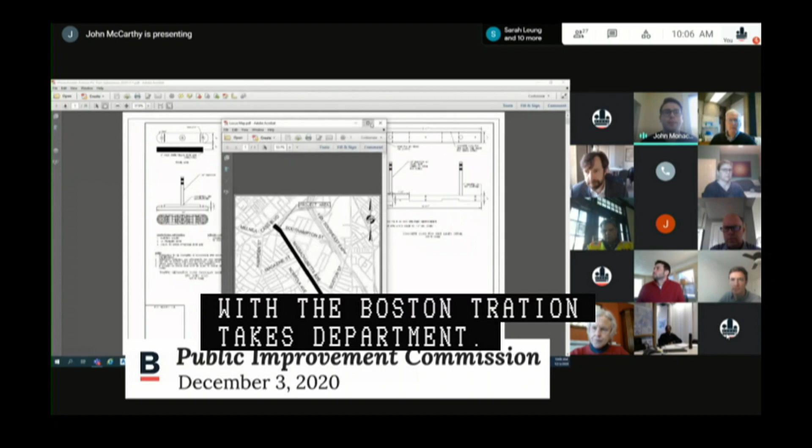While they prepare the screen there, just for an introduction, my name is John Monacelli. I'm a senior engineer with the Boston Transportation Department working on this project. I'm joined by our consultants from Toole Design Group. This is John McCarthy, who will be presenting and discussing the project. This stretch of Mass Ave is one of our worst crash corridors in the entire city for all users, drivers, people walking, people biking. What our project aims to do, as we brought to new business 2 weeks ago, is make specific improvements along that corridor to address some of the most significant safety issues that we have recorded. It's only the first phase of the city's work here.

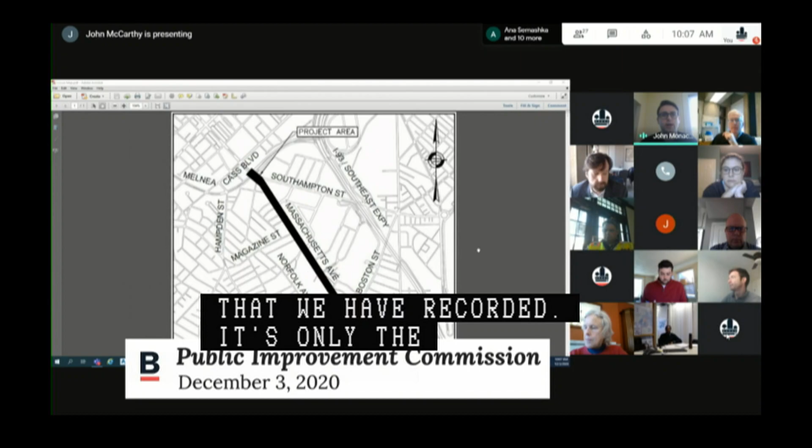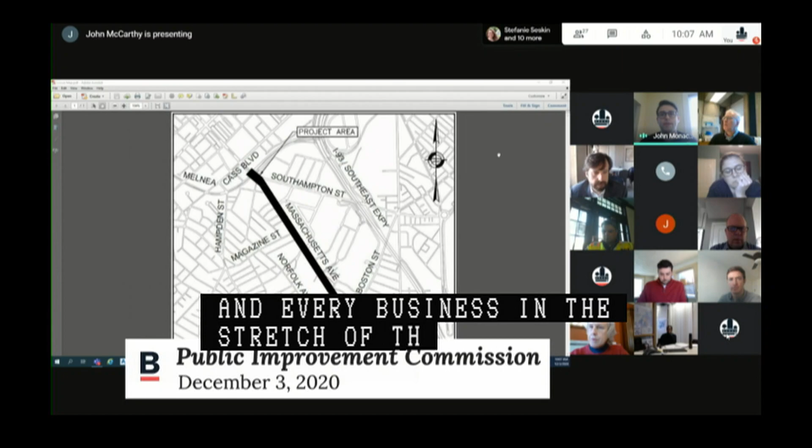There's a public works project to come back and follow us for a variety of other things. But today we're focused on creating accessible ramps, as the chief said, adding a two-way bike facility, and building accessible bus boarding island platforms. We kicked this project off over a year ago, engaged in extensive community outreach, abutter discussions and engagement, and every business in this stretch of Mass Ave. There's a lot of excitement and interest in these changes, and we're really glad to come back to you for this public hearing. We've received a lot of feedback from advocates and community members regarding our proposed changes. So again, John McCarthy with Toole Design Group, I'll hand this over to him to do a brief walkthrough of the project.

Good morning, everyone. Can everyone hear me? We can, John. Okay, great.

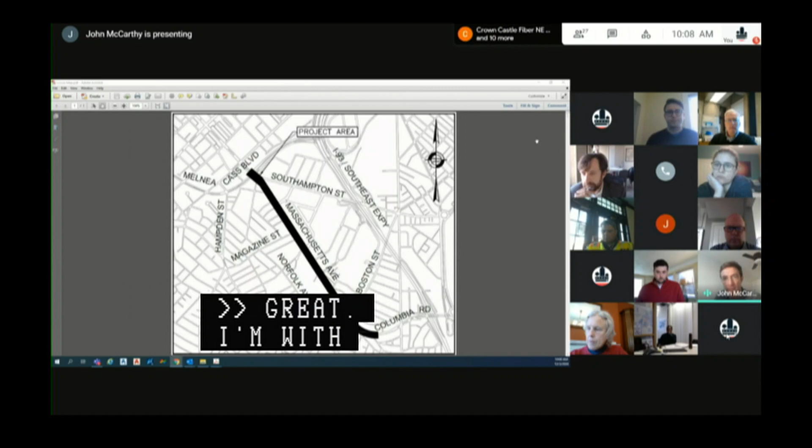As John mentioned, my name is John McCarthy. I'm with Toole Design Group. I'm presenting today on our 10-foot wide separated two-way bicycle facility on the west side of Massachusetts Avenue. As you see here in the map, our limits are Melnea Cass Boulevard to Columbia Road. I'm going to start with the detail sheet, since a lot of these are standard city details and we're going to be repeating them throughout the corridor. We start here with the concrete curb. This provides a separation between motor vehicles and the bicycle facility. It would be located within the stripe buffer, approximately 11.5 feet from the curb and 20 feet on center. As you see, the flex posts are mounted on those concrete curbs, providing that separation.

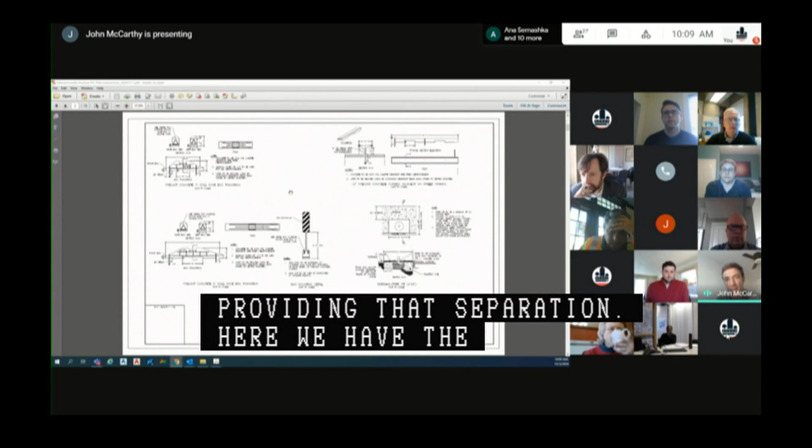Here we have the bullnose concrete curbs. These will be at the intersection ends for more visibility, so as vehicles are making turns they can quickly identify that there's a bicycle facility there. Again, we're using all city standard details for our curb ramp improvements, sidewalk repairs, and drainage structures. Then we have 5 floating bus islands along the corridor.

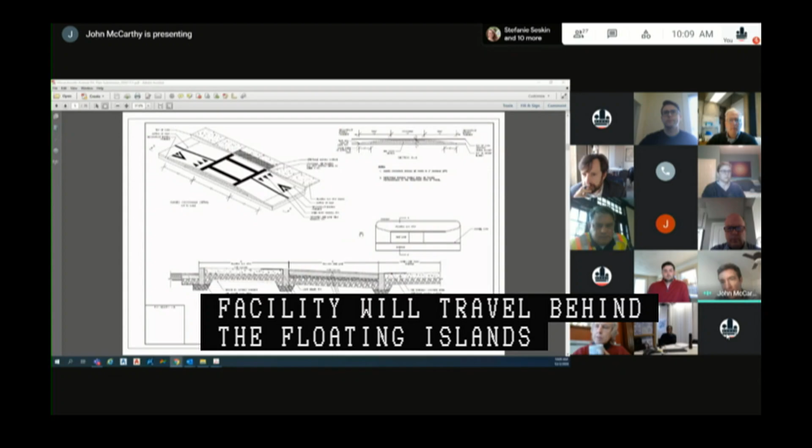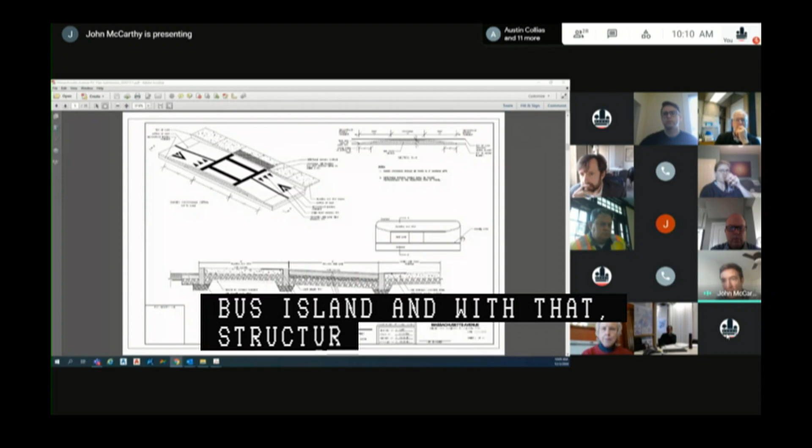Essentially the bicycle facility will travel behind the floating bus island. So if we look here in the plan view, we have a 10-foot two-way bike facility coming in. It narrows down to 8 feet as it moves behind the floating bus stop. People boarding and alighting the bus will use this elevated crosswalk and board from the concrete floating bus island. And with that, drainage structures had to be implemented at either end to capture stormwater, so there's no ponding due to the raised crosswalk.

Again, just standard city details for our drainage. And then as we get into the plan set, here we see the bullnose concrete curb end treatments, again at the intersections, and the standard concrete curbs, providing that separation with the flex posts along the corridor.

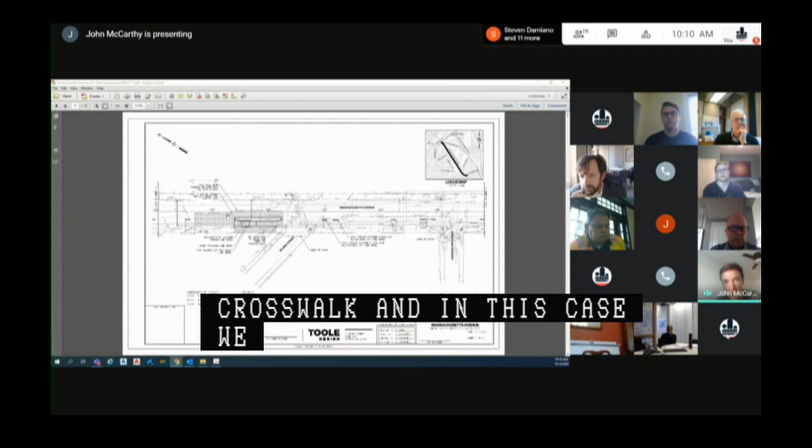Here's that floating bus island that we talked about in the detail, that raised crosswalk. In this case, we didn't need to put drainage structures in because we were able to regrade the roadway to make that drainage work. Again, we have the curb separators. Again, another floating bus island with regrading of the roadway, and here we see one of those new storm inlets.

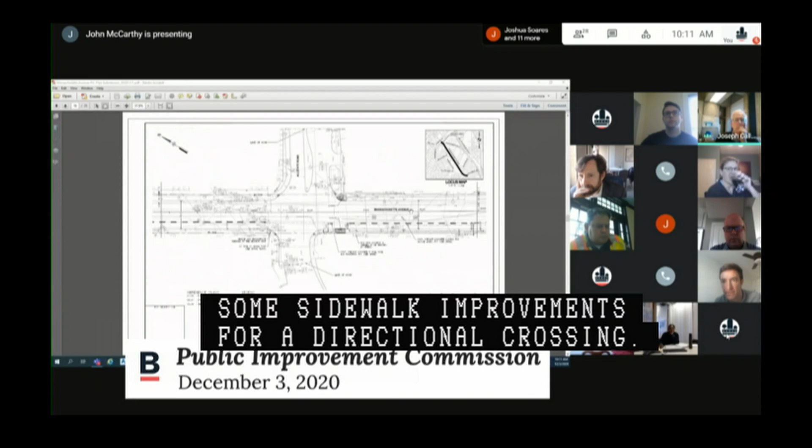Some sidewalk improvements for directional crossing. Again, some curb ramp improvements for directional crossing. Floating bus islands. And again, it's a continuation of the concrete curb barriers. And then our project ends at Columbia Road. Does anyone have any questions?

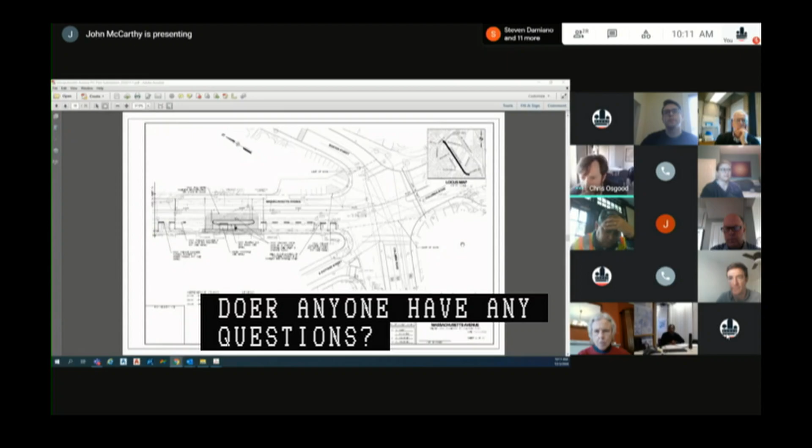Questions or comments by members of the commission? John, this is PJ. Can you hear me? Yes, I can hear you. Awesome. John, can you just zero in on one of your floating bus islands? It doesn't matter which one. I have a couple of minor comments.

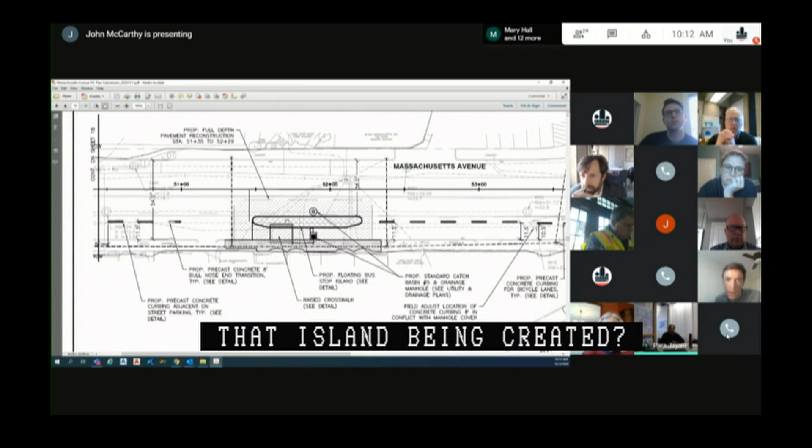Sure. Okay, so basically what is being constructed here is, let me make sure. Okay, so from the side of our sidewalks, we have a raised island that is being created. Yes? Yep. Okay. So at the two edges of your floating island, it is the bus island. Okay, that's what I'm speaking of. What vertical devices do you have to denote that you have an island in the middle of a travel lane? What do you have? I was unable to pick that detail up in your plan sheets.

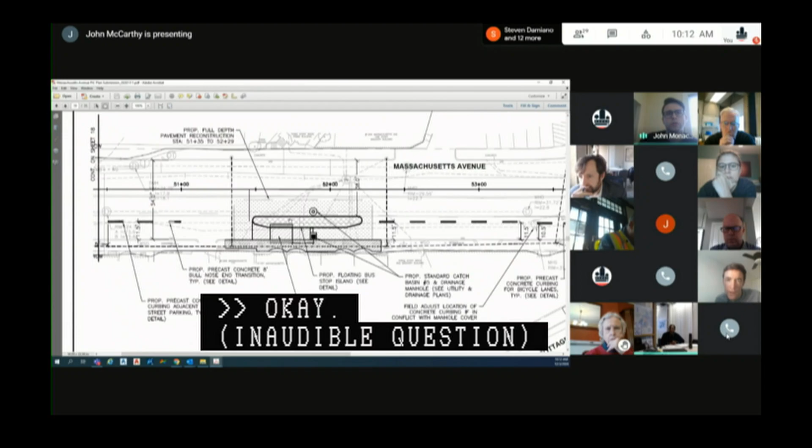So, John, I'll jump in here. So, Para, I know that the edge of that bus platform doesn't align with the curbing as shown here. As a minimum, we'll have the MBTA bus stop signposts at the front and rear to demarcate that the platform is for buses or for passengers.

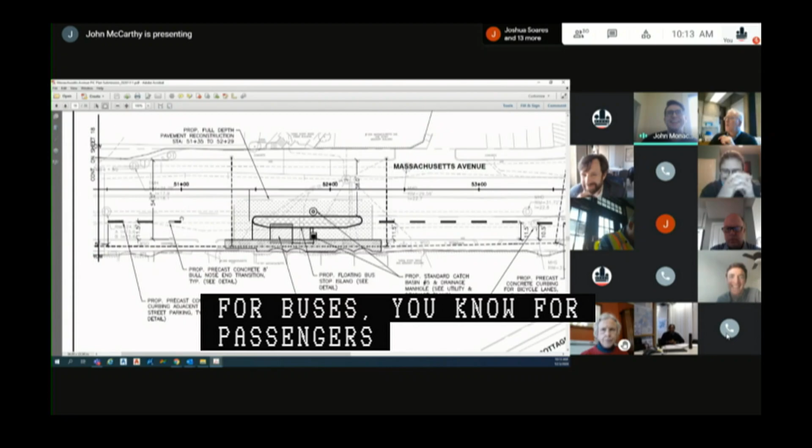John, excuse me. Okay, this is going to be weird because both Mr. McCarthy and Mr. Monacelli have the first name John. So I'll try not to mess this up. But Mr. McCarthy, could you please, since you are controlling the screen, control the pointer because this is a public meeting. Sure.

So this way you can synchronize Mr. Monacelli's comments to Mr. McCarthy's pointer. Pick either approach, and I want to understand the experience of a driver, someone in a vehicle, or a snowplow that is coming through this area where now you have introduced this island, and there's a sequence of signage that is needed in advance of the island and on the island. And I was unable to pick up what those items are in your plan sheet. So if I missed it, that's my bad. But if it is in the plan sheets, please tell me. And I'm desperately hoping that it is my bad.

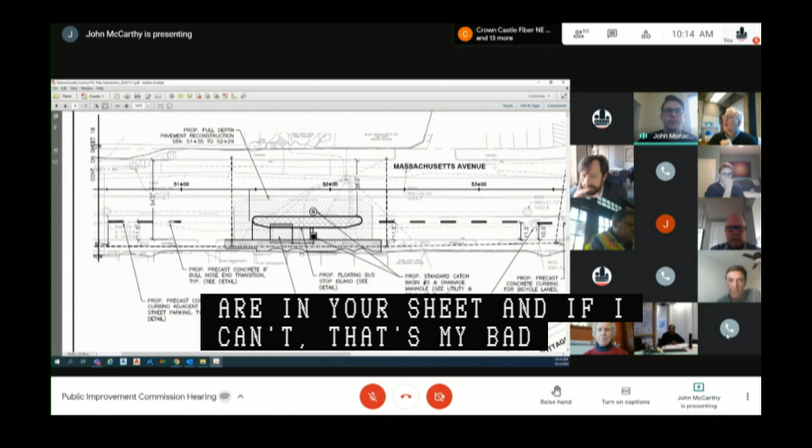No, a lot of the details are just in the sign and pavement marking sheets. So not your bad, Para. That small thing on the left there showing the bullnose with the two-tone white and black, that'll have a standard object marker sign on it. So that is one of the vertical elements there. And then again, on the platform itself, there will be the two signage posts for signs that say MBTA bus stop, no stopping, things like that. So those will be the same.

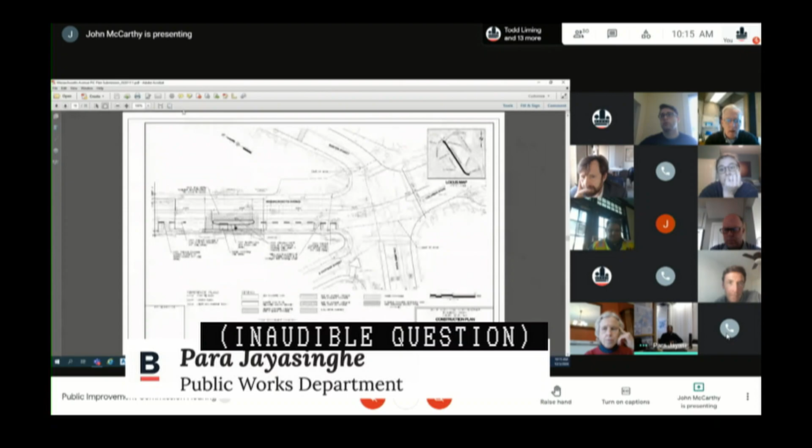So Mr. Monacelli, thank you so much. And Mr. McCarthy, since you showed 34 some pages, is that detail on the island somewhere within the sheets which you just showed to us? This detail, Para? Yes, so the vertical devices, where is this bus stop sign? Do you have the sign plan in this? I don't have the sign plan in this set, no.

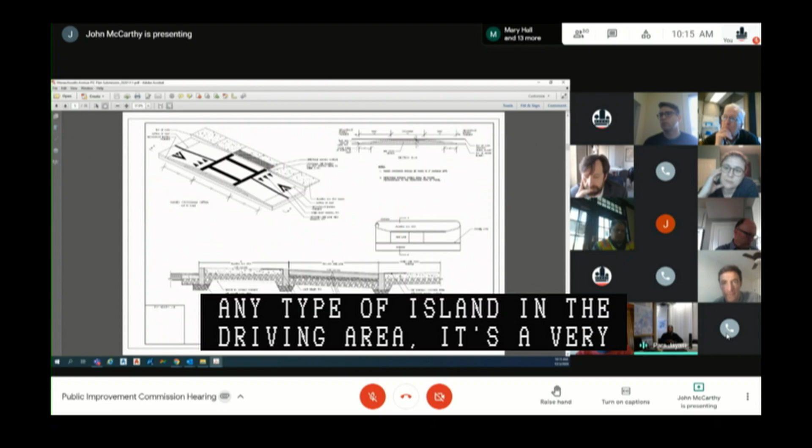Okay, all right. So I don't want to labor the point, but Mr. McCarthy, I hope you know what I'm trying to say. Because when you introduce any type of an island within the driving area, with snow and all of that stuff, there needs to be adequate visibility. Because Mr. Monacelli did mention that this is a very high accident corridor, and we want to make sure that what we are doing is going to reduce overall accidents, not just reduce one type and then have an increase in the other types.

So hopefully your signage plan for the vertical devices conforms first of all to the Manual on Uniform Traffic Control Devices and for highway design. I'm going to assume. Absolutely. Yeah, we'll make sure it is.

Awesome. Thank you, John. Well, nicely done. This is an amazing project, and kudos to all of you for taking on this challenge. Thank you. Thank you, Carter.

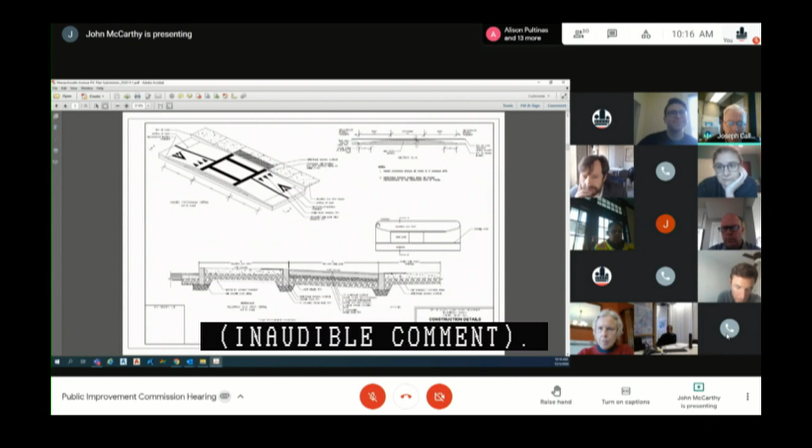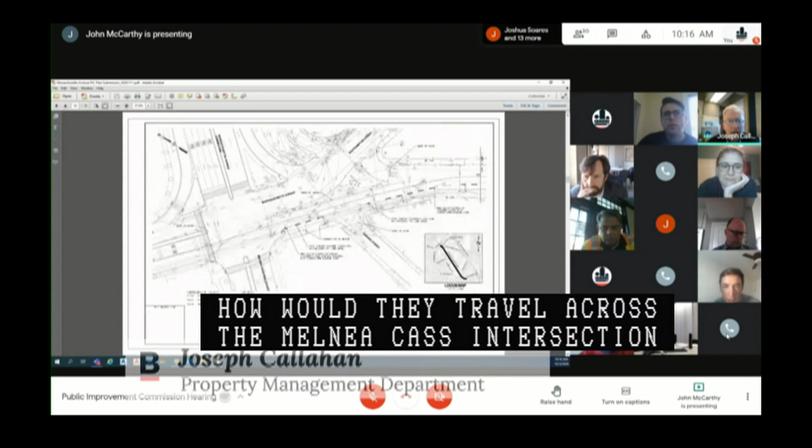I have one question. This is Joe Callahan from Property Management. John, if somebody's traveling on a bicycle from Columbia Road heading toward Charles River, just show me the path. How would they travel across the Melnea Cass intersection if they're on Massachusetts Ave? Do you have a recommended path of travel? Yes. You're talking about from here to here? Yeah, if they're traveling from Columbia Road to, say, the Charles River.

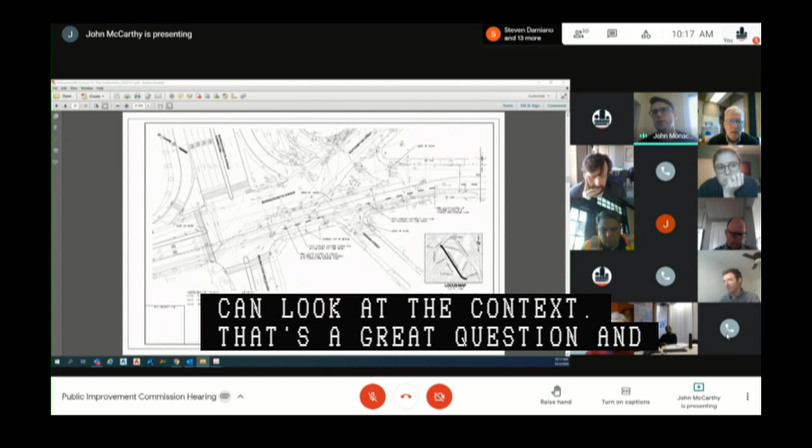And the bike lane is two lanes, two-way from Melnea Cass to Columbia Road. What happens when they cross Melnea Cass heading toward the Charles River? What's the planned path of travel? John, can you just bring up the pavement marking so that we can take a look at the context? Joe, that's a great question. The non-permanently built elements, the sheets on the pavement markings, will make that clear. The transition from the two-way to a pair of one-ways. Just give me one second, sorry.

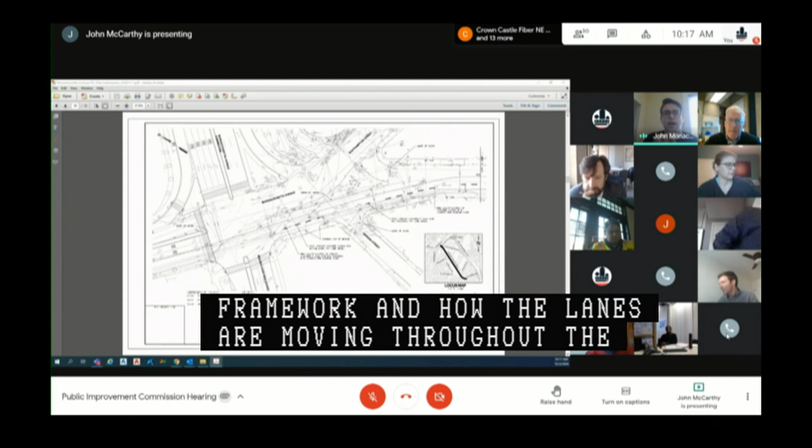Yeah, while John's doing that, we looked at the way that the signal operates here and worked within that framework of the different phasing and how the lanes are moving throughout the cycle of the signal. And then putting pavement markings and staging areas to work with that phasing so that cyclists can make the transition from the northbound two-way cycle track to the standard northbound one-way lane.

Yep, there we are. So left, crossing the intersection with the Mass Ave southbound through movements, and then you'll be crossing the street with the pedestrians, crossing Mass Ave with the pedestrians there. Okay, thank you. Thank you.

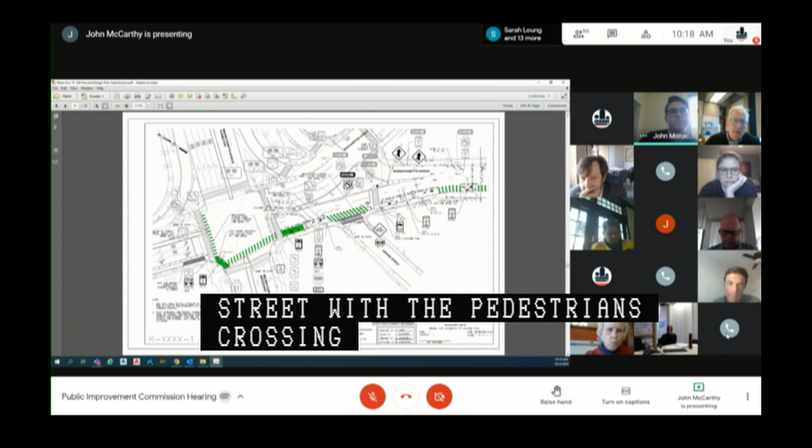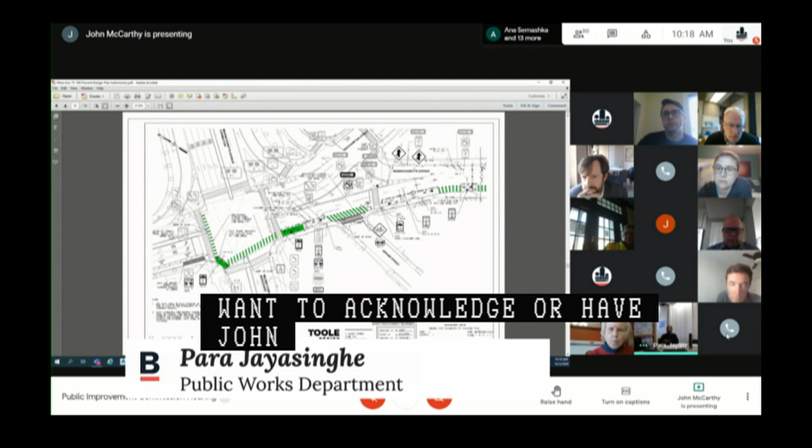Mr. Monacelli, this is again editorial comment for the purpose of a recorded public hearing. Your opening comments did emphasize the fact that this is a very high accident corridor. We are all cognizant. However, I just want to acknowledge the fact that even this intersection of Melnea Cass and Mass Ave, there's many challenges at this location. This project is not addressing those challenges, correct?

Yes. And even between the intersections of Melnea Cass and Columbia Road at the other end, there may be another series of challenging incidents, and all of that are not being addressed by this project. It is just a subset of things. So we are providing multi-modality in terms of bicycle accommodations and ensuring the safety aspect, but there's still another series of challenges which needs to be addressed. Is that correct? That's correct, Para.

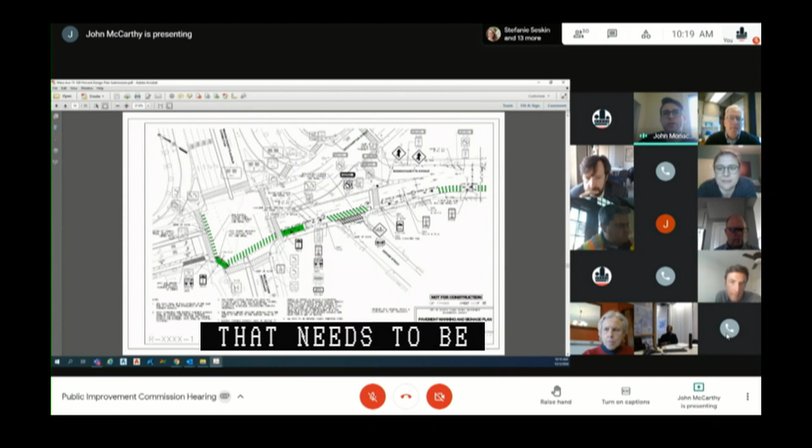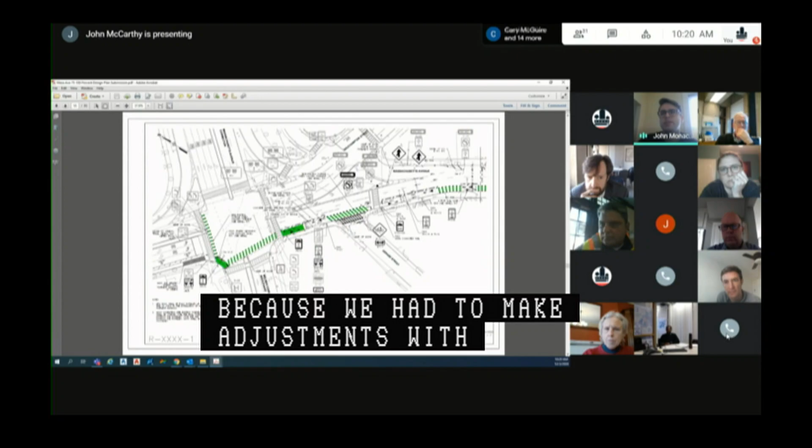Yeah, we're coming in and trying to put in a quick build scenario where we can separate out cyclists and provide a bit more of an experience for folks using the bus lines that are running down there. But yes, between Melnea Cass and Newmarket, there's a couple other initiatives that are coming through for lighting quality and sidewalk accessibility. We did, as part of this project, revisit the way the signals work, because we had to make adjustments with that, but we did make sure that all of the pedestrian crossings are compliant and safe, and bring it up to code. Thank you so much, John.

Again, not to labor the point, but a brilliant project. Thank you.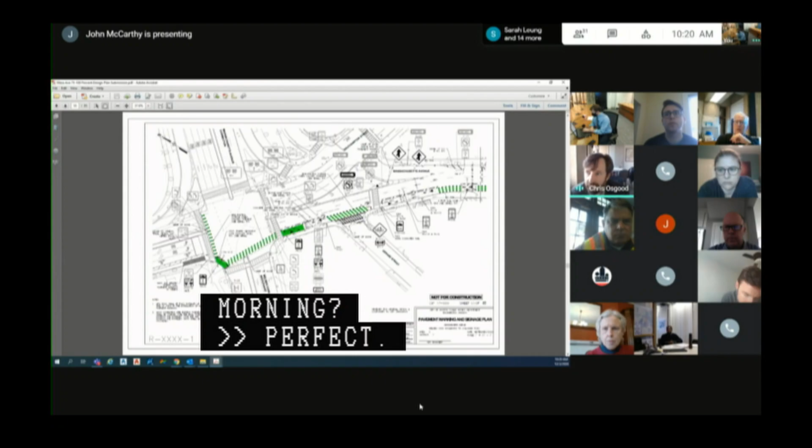Thanks, Pari. Other questions or comments? Todd or Robbie? I believe Chester Square had raised their hand to add testimony. Perfect. If members of the public have an interest in testifying, feel free to either put your name in the chat or use the raise hand function on the Google platform, and I'll turn it over to the Chester Square team to provide some public comment on this.

Hi, my name is Carol Blair. Can you hear me? Hello? Yes, Carol, we can, absolutely. Very good, thank you.

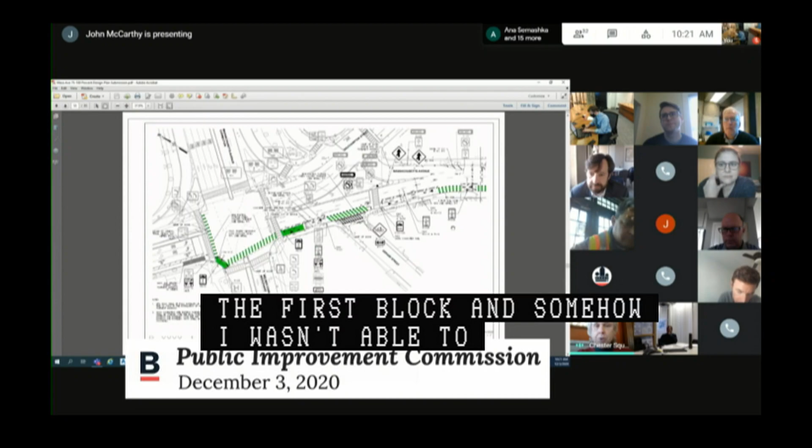Okay. I'm really excited to see this project. I actually saw the notice of the first block, and somehow I wasn't able to attend that, and I guess I wasn't on the list. So I was just unaware of the progress on this project, and it's great. I'm really excited because I go this way on my bike and walking often, and it's a Wild West place.

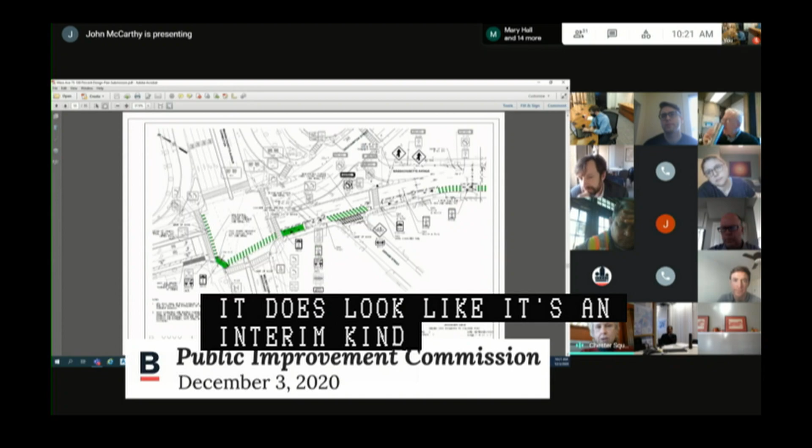So I'm really pleased to see this happening. I am especially concerned about this intersection. I appreciate Paris clarifying things. It does look like it's an interim kind of situation. A specific question I would ask is how the signage and so forth communicates to the cyclist that the intention is that they will cross the street twice

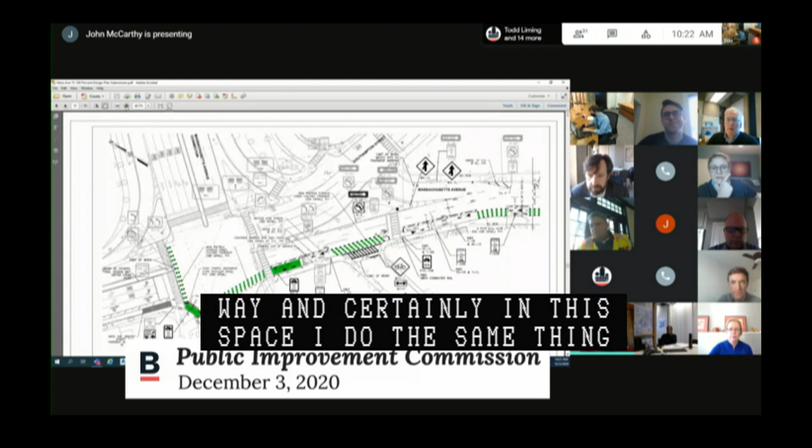on separate signals. I know for myself, having grown up in an era where bicycles were not specifically provided for, I'm accustomed to finding my own way, and certainly in this space, I do the same thing. So it's unlikely that I would practice the behavior that you're expecting, unless it's really, really clear that that's going to be the safe way for me to go. So that's an important piece.

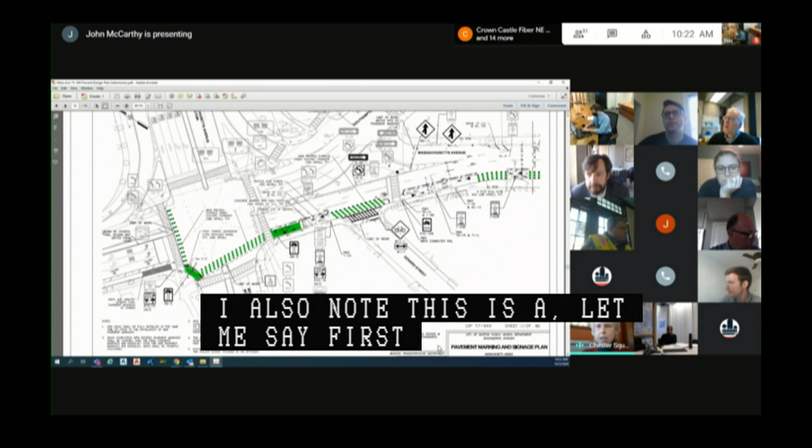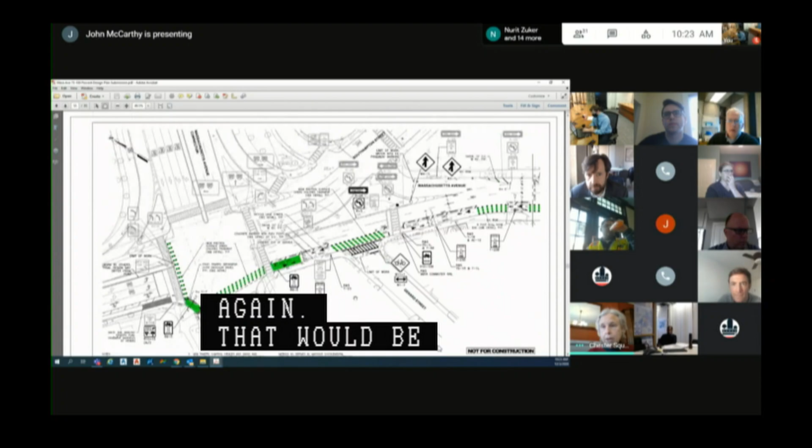Let me say also Island Street. I don't know if you looked at Island Street as a possible connector between Mass Ave and the Melnea Cass Boulevard bikeway. But especially for me, because I often come from the UMass side of things toward Northampton Street, I've picked many directions to avoid going around to Southampton Street and crossing Mass Ave again. I mean, that would be crazy. So I'll go down one-way streets and whatever. But if it looks like it would be easy to make a bike connection between Island Street and the Melnea Cass Boulevard, is it possible that could be made in the near future?

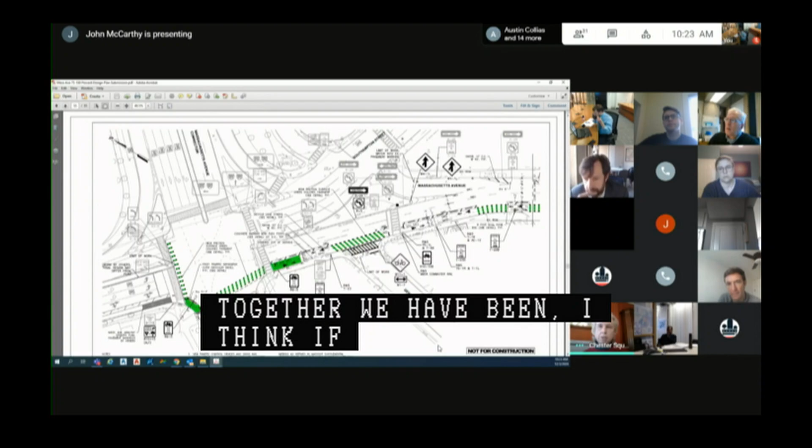And then one more thing I would mention. I'm president of Chester Square Neighbors. I've been working with my neighboring neighborhood associations, Worcester Square and Claremont, and we're beginning to work together as a Mass Ave coalition. I think if we pull in St. Botolph, then we will have the gap that's represented between the protected bike lane in Back Bay and the protected bike lane that you're giving us now. And we will be very eager to talk to you about how to treat that gap. And this transition will be an important piece of that.

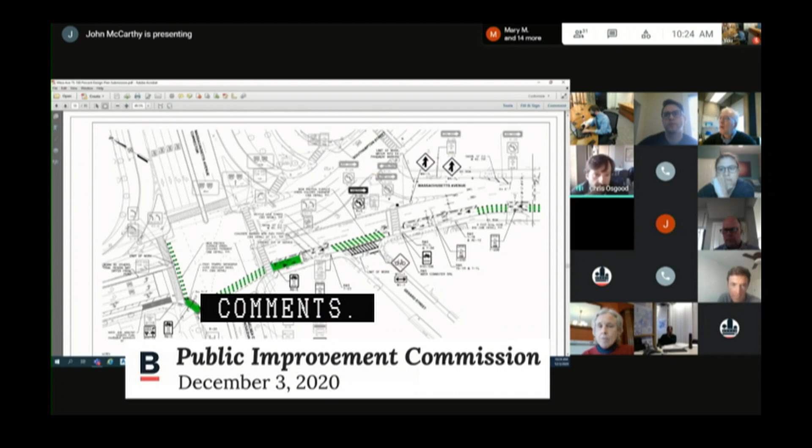Carol, I appreciate all those comments. Please tell me if I'm off on them. I wonder if either John Monacelli or John McCarthy can talk about the signage and how best to navigate this corridor in that intersection. I think Island Street is something which we would want to consider as part of the broader Melnea Cass Boulevard conversation that we're having, and how it would potentially be a path connecting in here. But I defer to John Monacelli on that. And I think we're joined by Stephanie Seskin as well, so between John and Stephanie, to hear a little bit about how to connect this stretch, to your point, with the northern end of the Mass Ave work. But anyway, sorry, John, go ahead.

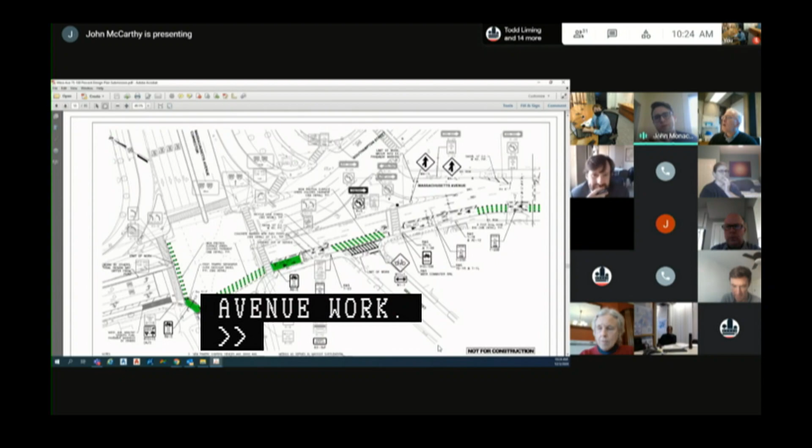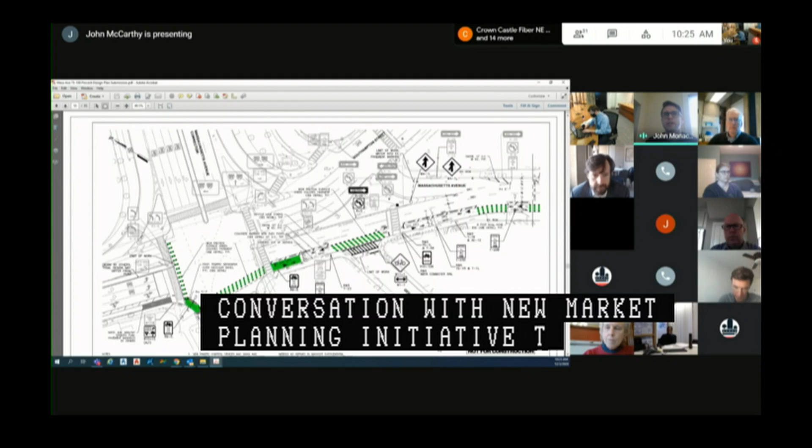No, that's fine. So the Island Street connection first. Agreed that is an alternate route to making some of these movements. However, we do have a lot of presence of heavy trucks, sidewalk conditions and things like that. So I think it's part of the larger conversation with the Plan Newmarket planning initiative to really establish what streets are being developed and built in different ways and what type of infrastructure and safe routes can be put through there. So right now, this is the most direct and safest corridor connection that we could make, establishing the space with the two-way facility, having that physical separation, and then bringing you all the way right to Mass Ave.

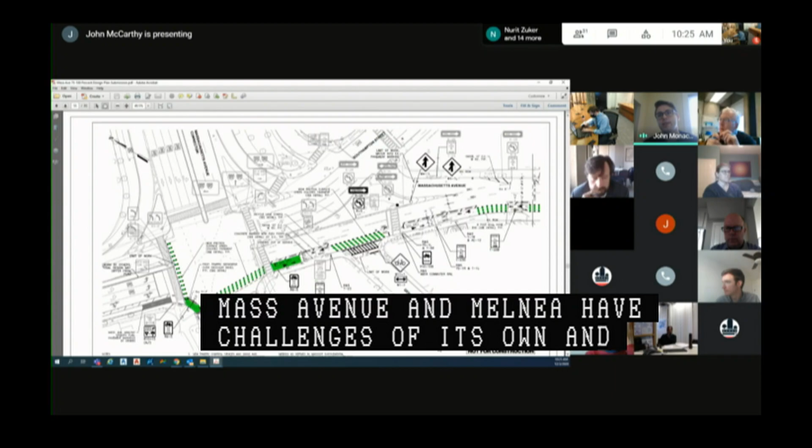Understanding that Mass Ave and Melnea has some challenges of its own. And again, as the chief and Para both iterated, it is part of a larger thing that needs to address a handful of those all at once. The issue of the crossings, about clarity. Not seen on the PIC plans because it's mostly the construction elements, but at many of the signals we are adding bike indications so that it's clear at what point in the traffic operation of the intersection cyclists should be going southbound or northbound on the facility. So many of those intersections will have those indications where they're necessary and where the clarification is really important.

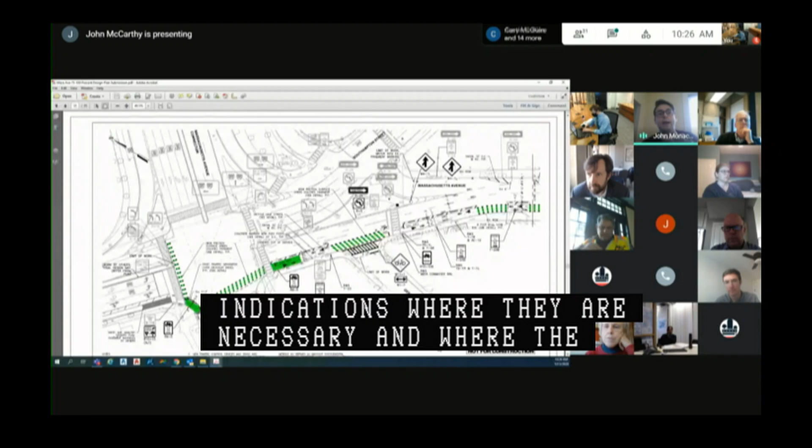Here at this intersection, with the challenges of this location and the size and the equipment of the signal, right now what we're doing is we have these signs, and John, if you could zoom in just a little bit, you can see on the bottom two corners there's a panel. Yep, the R9-5 indicates to cyclists to use the ped signal. So right here, the way that the pedestrian crossings operate, you would just be crossing in parallel with the pedestrians, and the green paint, the skip markings, really carve out a space and identify it very clearly, very vibrantly, that's for cyclists to be in.

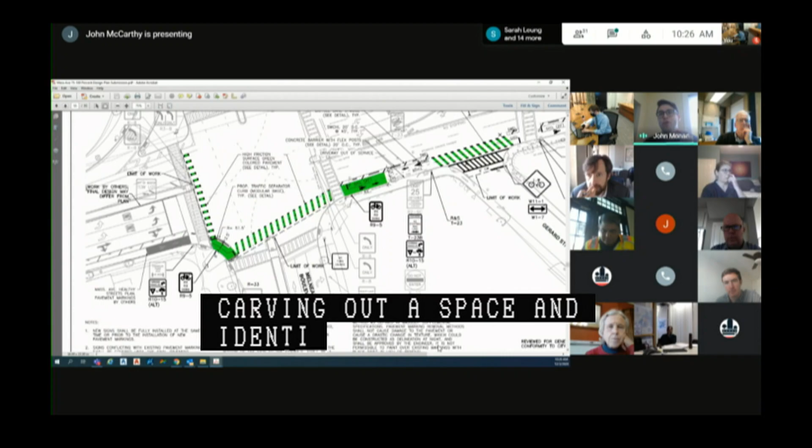Just giving that indication. And again, this intersection is part of a much larger conversation that, a handful of improvements are certainly needed. And to your point about Mass Ave, I can't comment on that one, about filling the gap between Harrison and Westland or so. But yeah, just leave that up. Looking forward to it, until they actually do.

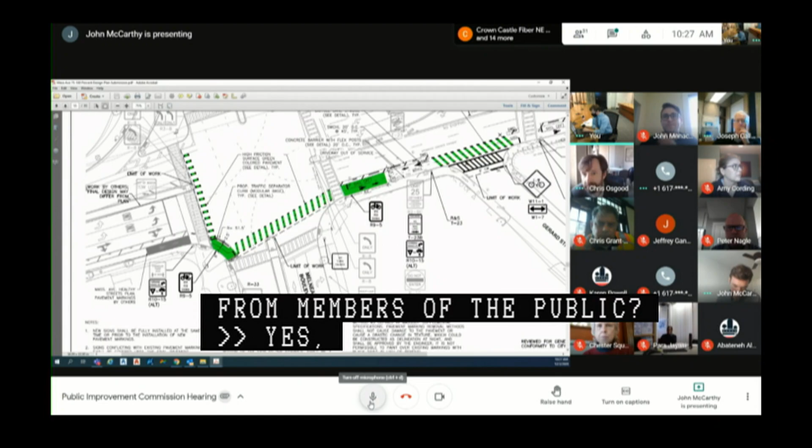Carol, John, thank you so much. Other questions or comments from members of the public? I don't know, Todd, if we see there are other hands that are raised. Yes, Allison Poltinas. Allison? Allison, you may still be muted.

Hi, good morning. I'm really interested in this, very happy to see a two-way path here. A couple of schedule questions. When will this happen? And when are you expecting work on the challenges of the Mass Ave Melnea Cass intersection?

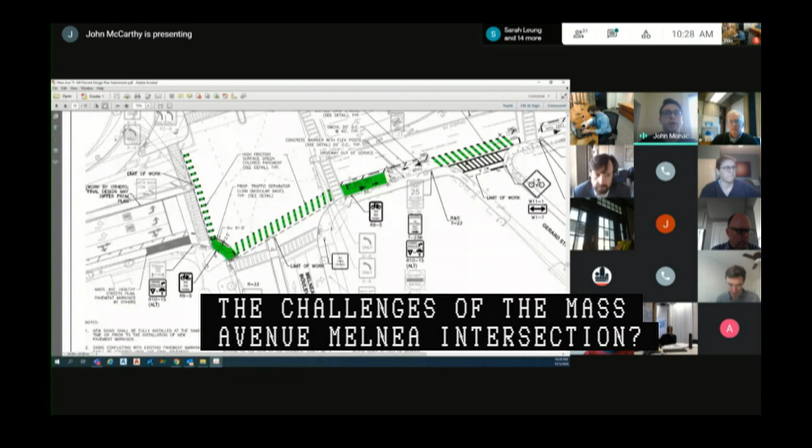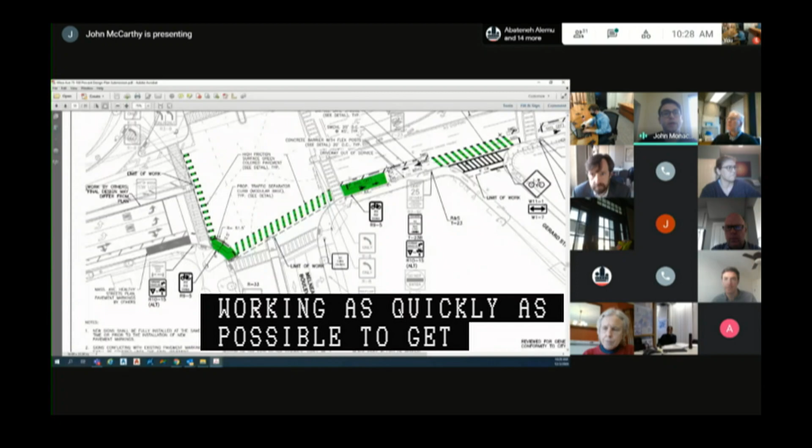So this project here, we're working through the next stage of design with our consultants for this. We probably won't see this implementation until sometime next summer at the earliest, just because we're working through a number of approvals and reviews and things like that. But we are working as quickly as possible to get this on the ground, knowing that it's a necessity and a real improvement. I can't speak to the construction improvements of this intersection specifically, though. I'm just not a part of that project there.

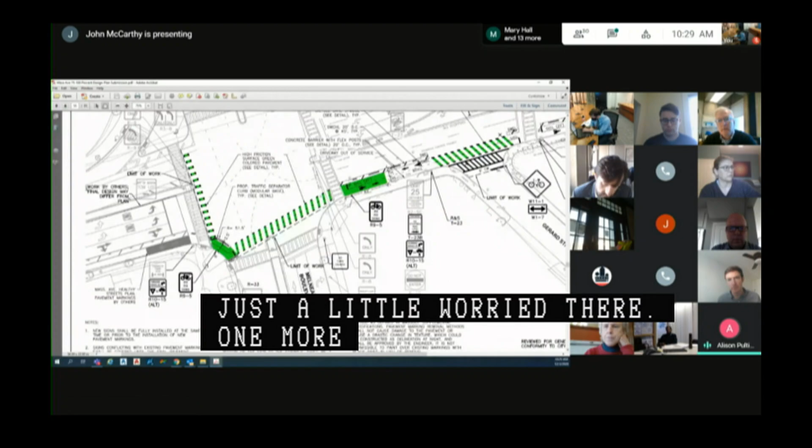Okay, because my concern would be, again, that this is great what you're doing, but will it actually put people in danger at that intersection who are feeling safe, and then all of a sudden they're in an unsafe condition? So just a little worried there. One more kudos, though. I appreciate the fact that you went out to the businesses and the community first before creating the design. That was very helpful. Thank you.

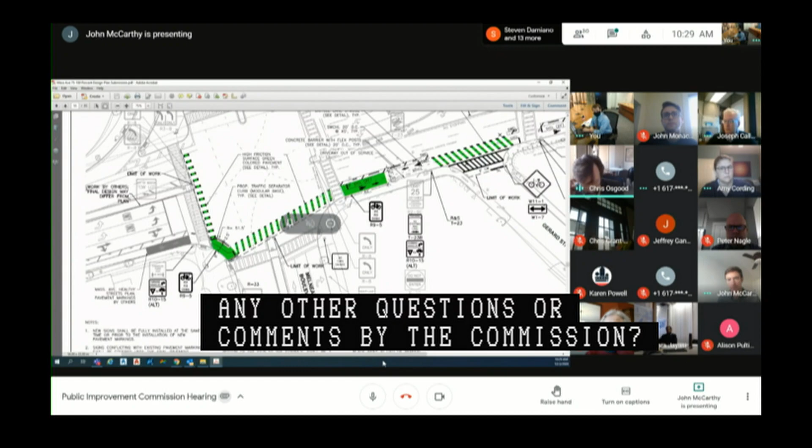Thank you so much, Alison. Other questions or comments by members of the public? I do not see any at this time, Chair. Okay. Any other questions or comments by members of the commission? All right, I'll entertain a motion and a second. I'll make a motion on a joint petition by the City of Boston Transportation Department and the City of Boston Public Works Department for the making of specific repairs in Massachusetts Avenue and Columbia Road as read into the record by the chair. Second. All in favor? Aye. Aye. So moved. Thank you so much. Thank you very much, commissioners.

Good morning, everybody. Good morning. My name's Brian Cunningham. I'm with Crown Castle Fiber Operations, and I'll be representing Crown Castle on this project. I'm also joined today by Mike Saraceno and Anna Samashka, also from Crown Castle. I'm going to bring up the project now.

Can everybody see this plan? I can't yet, but that might just be me. I know it looks like others can't as well. If need be, Brian, I think probably Todd or I might be able to. Let me, hold on one second and see if this... We got it. Yep. Perfect. Got it? Okay, great, thank you.

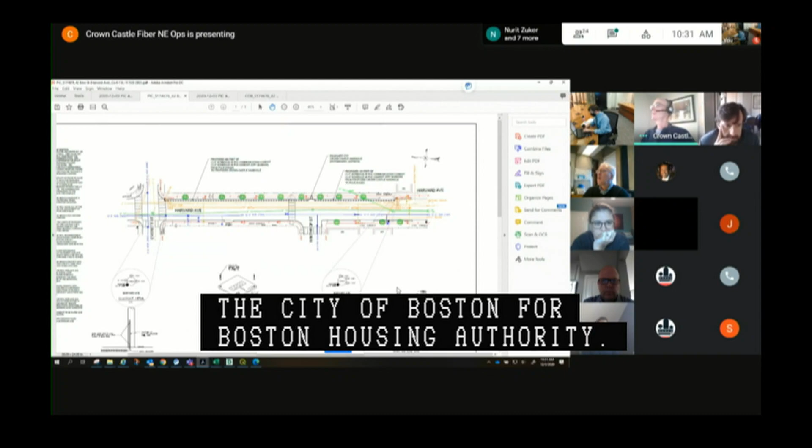Okay, we have an order to provide service to the City of Boston for a Boston Housing Authority location on Bow Street in Hyde Park. In order to provide that service, we're seeking approval to dig and place a trench and install fiber on Harvard Ave, roughly between Everett Street and River Street, from pole 1629/2 over here at this end to pole 1629/5 over at this end. The trench will be 351 feet long.

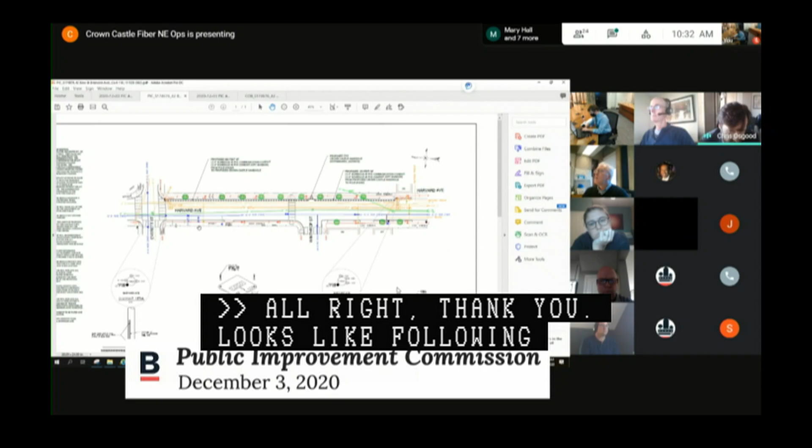Great, Brian, thank you. And it looks like following the new business, the handhold that is going to be added is now in the furnishing zone. Is that right? Yes, correct. We were asked to move this handhold; we originally had it in the street here. In the new business hearing, we were asked to move it into the furnishing zone, which we did and changed the plan.

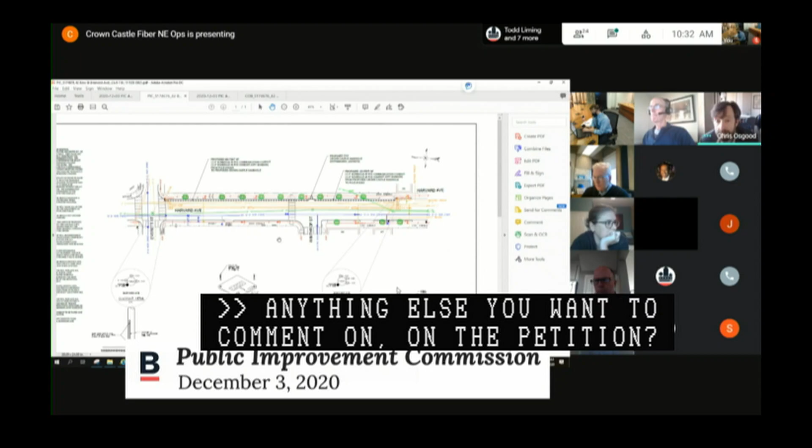Anything else you want to comment on, on the petition? Questions or comments? Oh, go ahead, Brian, sorry. No, I don't believe so. Thank you. All right, questions or comments by members of the commission? Todd or Robbie? All set? Any members of the public? I see none. Okay, I'll entertain a motion on this item.

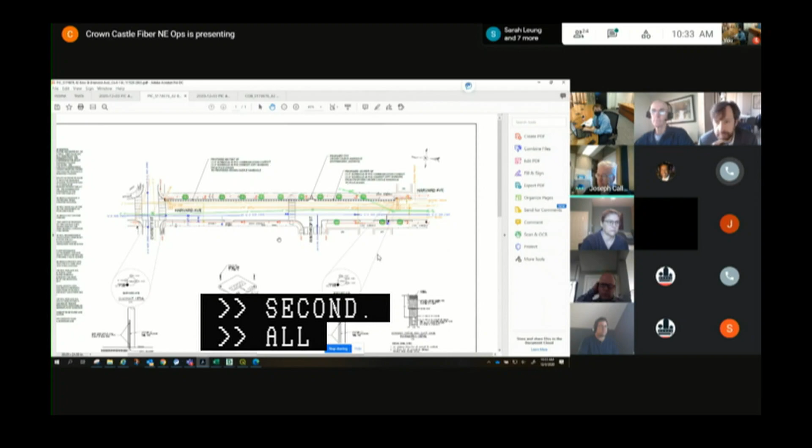I make a motion to approve a petition by Crown Castle for a grant of location on Harvard Avenue in Hyde Park as further read into the record by the chair. Second. All in favor? Aye. Aye. So moved. Thank you so much, Brian. Thank you very much, everybody.

Thank you. Our third public hearing item is on a petition by National Grid for a grant of location to install a gas regulator station and associated infrastructure within Seaburns Avenue, a public way in West Roxbury from Center Street to a point southeast of Brown Terrace, generally at address number 17-19. This was new business on November 19th, 2020, and this is as shown on a set of plans entitled City of Boston Public Works Department, Engineering Division, Grant of Location Plan, Seaburns Avenue and Brown Terrace, Jamaica Plain, 5 sheets dated October 26th, 2020.

Go ahead, Peter. Peter, you're on mute. Better? Thank you. Good morning, Commissioners. Peter Nagel from National Grid. Today, National Grid would respectfully request the Commission's considering a deferral till the next hearing based on conversation with staff. There were several requests at the new business hearing that we would like to close the loop on, and I feel that the 2-week time frame would be more than sufficient to meet those remaining loose ends. Perfect. Thanks so much, Peter.

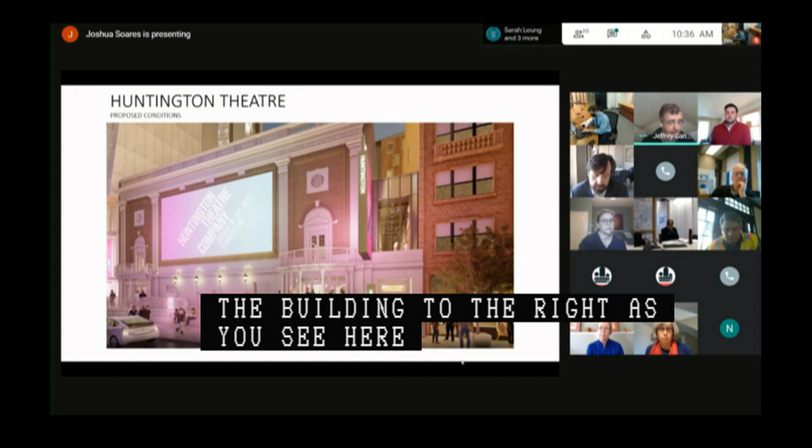Perfect. While he's doing that, this project is a renovation of the historic Huntington Theatre, both interior and exterior. We are putting all new mechanical, plumbing, and electrical systems in the building as part of this renovation. We are not altering the envelope itself, except for putting a small second story addition on what we call the arcade, which is the narrow piece of the building to the right, as you see here. Our team today is Bruner/Cott Architects, and Shawmut Construction is the contractor, and Bruner/Cott's sub-consultants, who I will introduce individually, the folks who will be able to take you through the details and answer any questions: Joshua Soares of Nitsch Engineering, Mary Hall of GZA Geotechnical, Regina Olivieri of Shawmut Construction, and Nareed Zuka from Bruner/Cott.

What we are asking for today, or proposing today, is a temporary support of excavation in the sidewalk outside the building that will allow us access for utility connections and the foundations of the repair and replacement of the historic terrace on the front of the building. So unless there are questions from the commission, I will hand it off to Joshua to take you through the plans and the details. Thank you.

Thanks, Jeff. Sure. So good morning, everyone. Chief Osgood. Again, my name is Joshua Soares with Nitsch Engineering. Let me progress through the presentation here. As Jeff highlighted, what you see on screen here is the proposed conditions, the plaza upgrades. And for context, just a few shots of the existing conditions. The shot taken from the southwest corner of Huntington Ave, showing the elevation and the current sidewalk conditions.

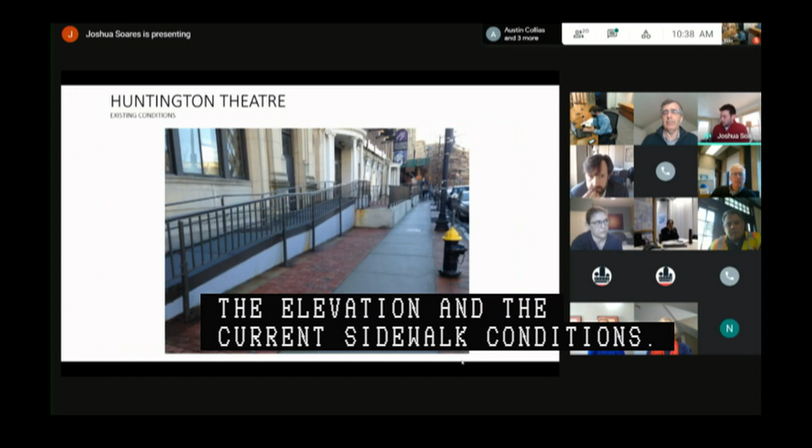So within this public right-of-way, we are proposing the installation of temporary support of excavation. The SOE will consist of steel micropiles and timber lagging. It's proposed to extend along the entire face of the building, roughly 97 feet. The SOE will be internally braced.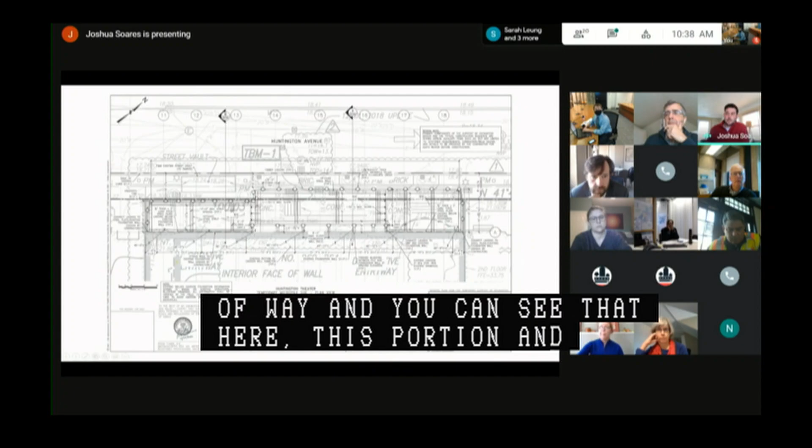However, portions of the SOE will extend beyond the property line and into the right-of-way. And you can see that here, this portion. And that is required in order to accommodate the installation of the underground stormwater detention tank outside of the property beneath the sidewalk.

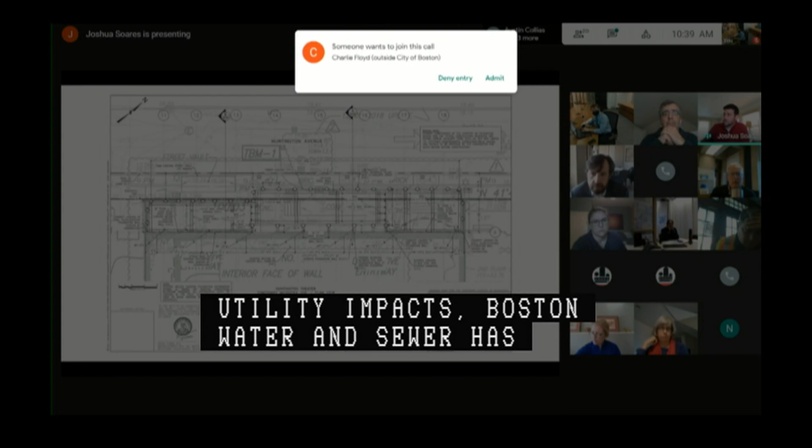So as far as pedestrian detours through the excavation, a CMP has been provided by Shawmut and is being coordinated with BTD for the pedestrian detours. And as far as existing utility impacts, Boston Water and Sewer has noted that there's an existing catch basin adjacent to the project site and will require a video inspection prior to construction. And also MBTA has a right-of-way within this area that we will take note of.

So as far as anything technical, Mary Hall is on the line from GZA, should anyone have any questions.

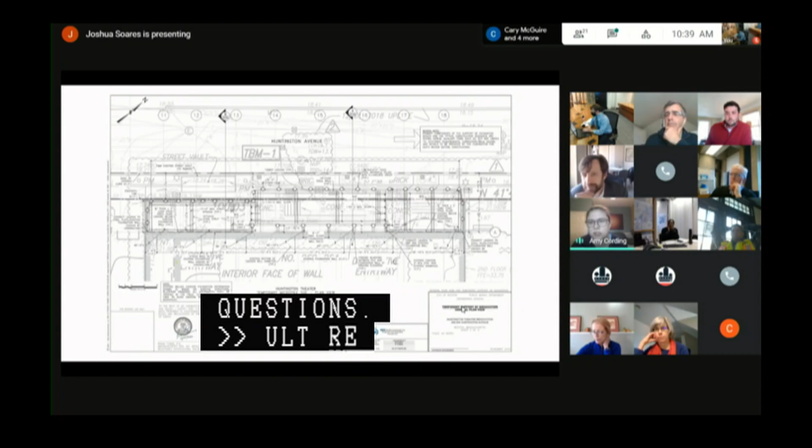Question unrelated to this action, but in the rendering, it showed a big sign on the side of the building. Right now, that's kind of a static, just hung thing. Is this digital, or is it the intention to just continue to hang banners on the side of the building? Two things, Amy. There will be a banner in the central portion here that is not digital. There is a blade sign which is there now, which is static. Our intention, although it's not finalized, is to make that partially digital. So that marquee would not overhang the public way. But the thing that's intended to overhang, hanging down the side of it, the intention there is it's going to be digital?

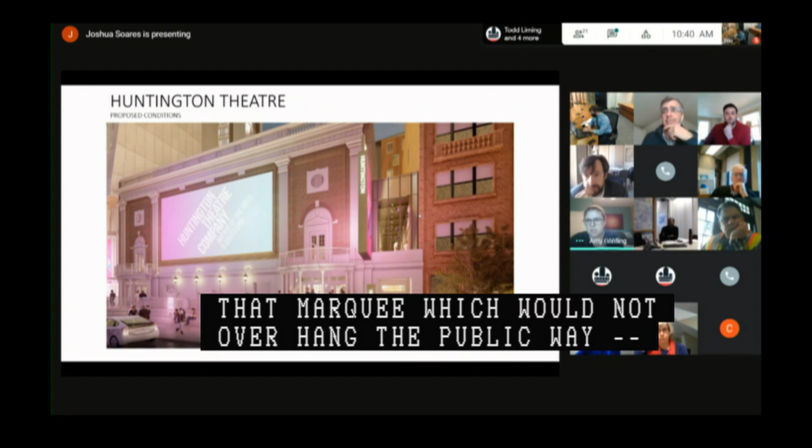Correct. Okay, so not related to this item, but I think that we should have a conversation about digital stuff where it can show up, regardless of whose property it's on, just to make sure you're conforming with what we allow for digital signage. Absolutely, and we have not finalized that, and when we do, we'll be coming back for additional approvals in the proper ways. Yeah, so I would just suggest that you get the rules before you submit the design, just to know what we would allow. Will do. Amy, thank you for flagging that.

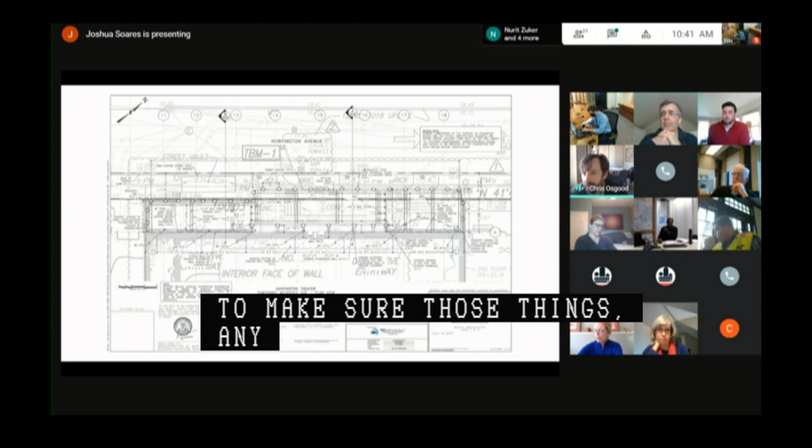Josh, to your point, and you might have briefly covered this, but given the proximity of E-line subway tunnels, the walls of the underpass, Symphony Hall across the street, I assume all of those things have been taken into consideration as part of the excavation plan that you guys are putting in place to make sure that any disruption is minimized to any of those assets and other things that might be in or around the right of way. Sure. Mary, do you want to speak on that?

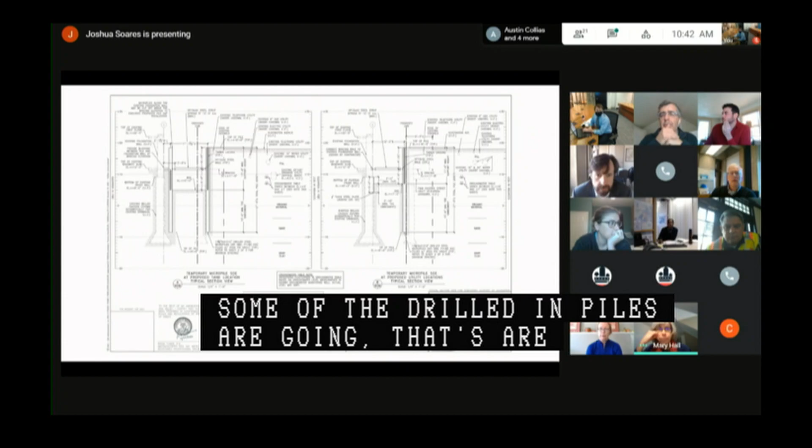Sure. Yes, we definitely considered that. This system consists of drilled-in piles. We're using drilled piles versus driven piles for vibration reasons, just to keep vibrations very low. When we're looking at this section view, you'll see these dashed or dotted lines very close to where some of the drilled-in piles are going. Those are actually caissons that support the existing entranceway of the theater. So those are basically being abandoned in place.

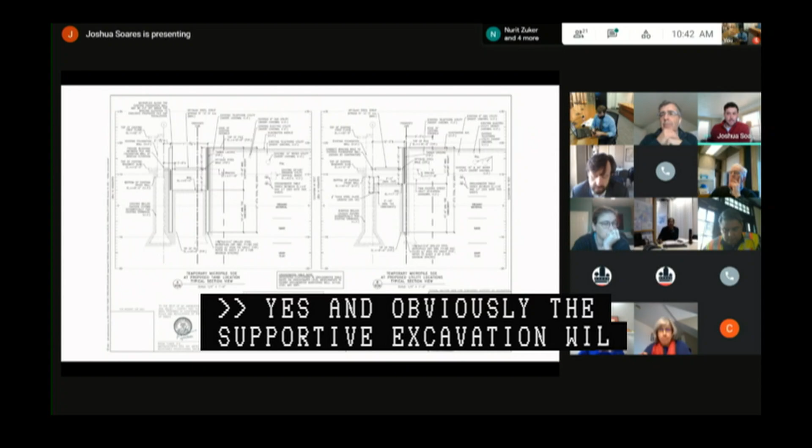When you first look at this plan, it can be a little bit disconcerting that you see those there, but those are being abandoned in place and don't have a future structural use. The tunnels are obviously beyond where we're doing the work. Yeah, and obviously the support of excavation will be removed to a depth of 6 feet, and anything will be abandoned in place below that. Right, yeah. Great, Mary, Josh, thanks so much.

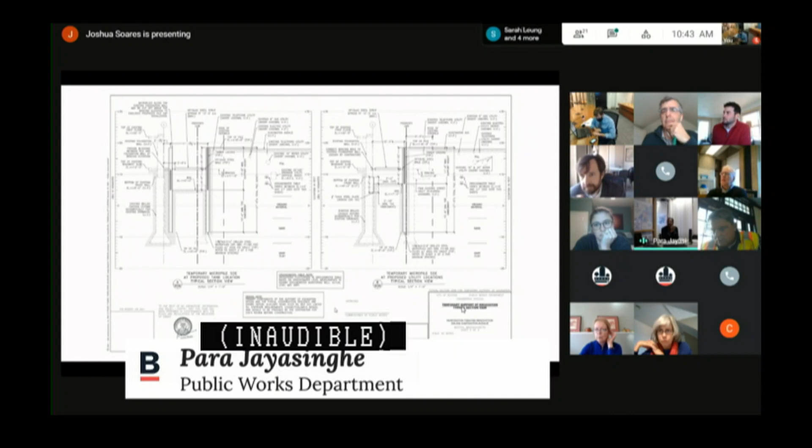Other questions and comments by the members of the commission? Mary and the project team, I feel like I'm having this awful deja vu feeling here. Did you all come in front of the PIC for any prior action with this project, or am I mixing up theaters along the Huntington Avenue corridor?

I don't believe that we have come before you. There was some enabling work done maybe 2 years ago in advance of this. There were utilities that came into the adjacent building, which was owned by the theater, which we moved to connect directly to the theater. There was, I believe, a PIC hearing and approval for the tower, which is the project adjacent to this, which we are not involved in directly, other than renting space in it when it's completed. So that may be what you recall.

Thank you, Jeffrey. It is entirely possible I'm mixing stuff up, but since you are here, I think maybe they understand what it is that I'm trying to say. So the Symphony Hall across your building, are they aware of the work which you all are doing? Symphony Hall is always extremely concerned about vibrations, okay? So there's a city-owned asset, which is the Mass Ave Bridge over Huntington Avenue. That has seen better days. It is quite functional, but we have a little bit of a concern about its ongoing structural soundness. And then also Symphony Hall.

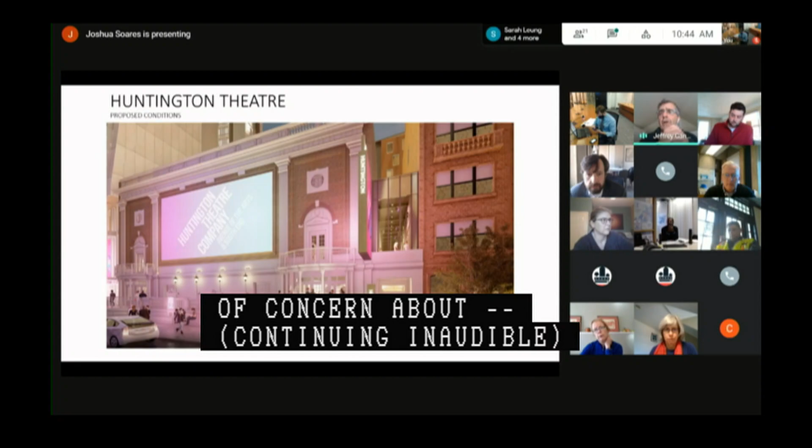So let's start off with the Symphony Hall people. Jeffrey, have you all had any conversations with the good people at Symphony Hall for them to be mindful of the designs which Mary is shepherding? I have not specifically, although I know that my company is doing a separate planning project with them, and so I can certainly have those discussions through that other team with them.

Jeffrey, it will be so useful for us because since you are asking the Public Improvement Commission's permission to do this work, if something awkward happens at Symphony Hall, they might not think favorably of us. So before the public hearing, it will be nice for you to convey to us, the commission, that you have had fertile conversations with Symphony Hall people, that they are cognizant of what it is that you are doing, and that you all are receptive to the concerns Symphony Hall may have. So that is one, that's the private sector.

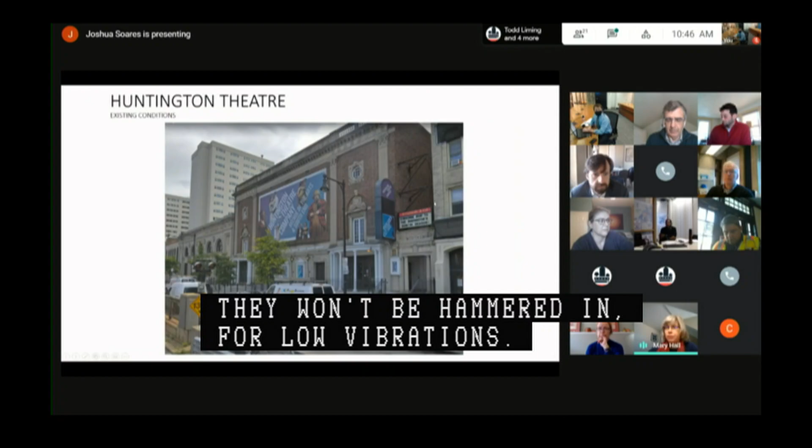And then Mary, I equally have concerns about your piles. Are you vibrating or hammering them in? We are drilling them in. They will not be hammered in. We're drilling them in for low vibrations. And do you have structural engineers maybe as part of your geotech team? I'm just trying to find out. Yes, and actually the engineer that stamped the plans does structural designs of earth support systems for contractors as his bread and butter work.

Awesome, Mary. So with that understanding, I'll try and make arrangements for you all to get a copy of our bridge inspection report of our structure. Okay, that'd be great. Really awkward, Mary, and you know how this happens, right? Vibration, movement, and suddenly things fall on people's heads. And when things fall on other people's heads, it is I who actually get a bad headache, and I have enough headaches as it is. So let's be mindful of some of the assets that are here. For some strange reason, I feel like I've had this conversation about this area. Maybe there are other projects happening that might be impacting Symphony Hall. Either that or I'm dreaming all of this.

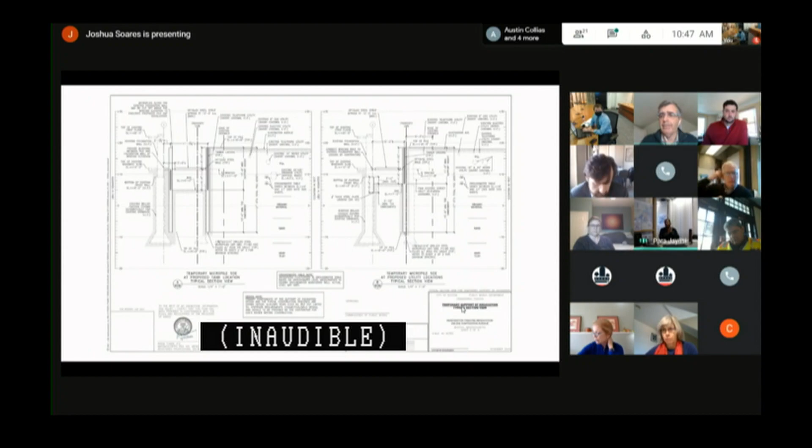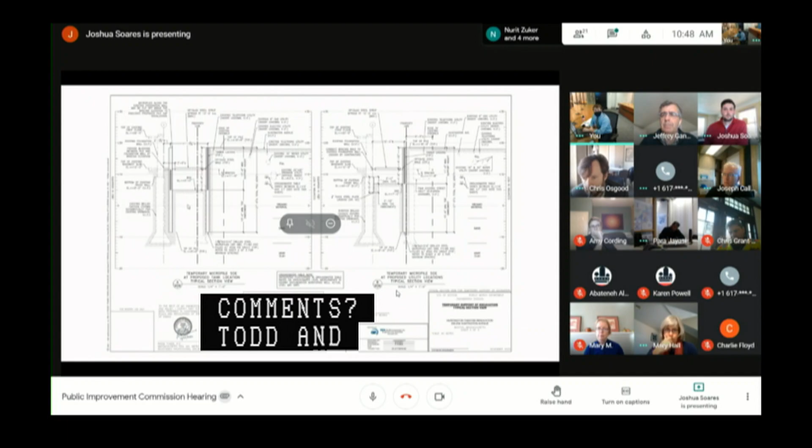Thanks so much. Other questions or comments? Todd or Robbie? All set? All right. Any members of the public? I see none. Josh, you sort of mentioned this, but is 2 weeks enough time for you and for Mary and for Jeff? I believe it is, certainly for Symphony Hall. Mary, I imagine for the bridge as well. Yes. Great. We'll plan to see you then on December 17th. Thank you very much. Thank you to the commission.